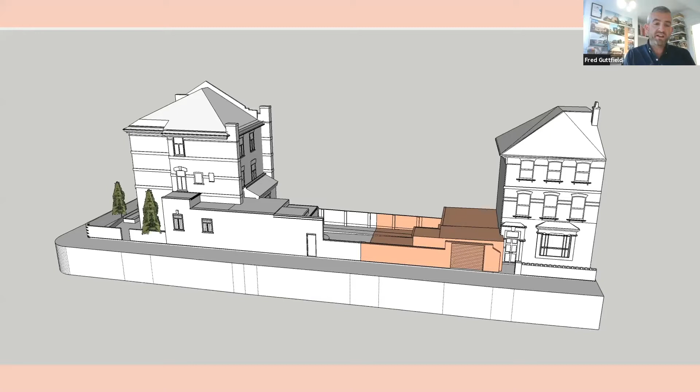So you have the frontage house on the main road, and then the side road which goes alongside the garden of the frontage house. The site in this case is the highlighted area. The frontage house is on the left, and the back garden is the site.

In this case, the site is very small. It's only 11 meters side to side and 8 meters back to front. The front elevation faces roughly southeast.

When we first visited the site and met our potential client Mary, we had to battle our way through lots of undergrowth to find the bottom of the garden. At that stage, there was a rundown workshop and garage structure.

At this meeting, Mary started to explain some of the very long and difficult history she had with the site.

She owned the frontage house on the left of this image. Originally her aim was to really sell the bottom of her garden with planning permission as a development. So back in 1999, she applied for a quite traditional new build house scheme on the site.

That was refused. She appealed, and the appeal was refused too. She left it a few years to see what happened, and started to notice more contemporary back garden schemes happening around Hackney, especially in conservation areas, and sensed there had been a change in attitude from the planners.

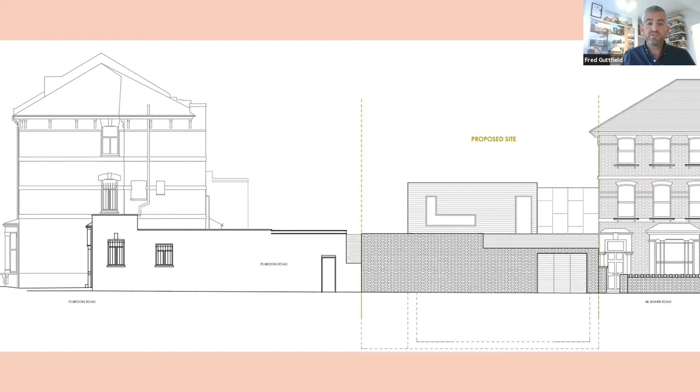So she thought about finding another firm of architects, not us, someone else, to develop new schemes for the site. A 2-story plus basement scheme was submitted, but unfortunately that was refused. Then they developed that scheme by taking a story off, so a 1-story plus basement scheme was submitted, and that was also refused.

So what year are we at now, Fred? How long into the process is this? I think we are probably, from memory, certainly post 2005. So between 2005 and 2010, that kind of era.

Understandably, she was losing faith at this point. But the interesting thing about Mary is she has training as a barrister, though she hasn't worked as one. In the end, she decided to take this scheme herself and write the grounds for appeal and appeal it.

She was quite lucky in that they were able to get a site visit with the guy from the appeals service, and eventually the appeal was successful. So she found herself finally with planning permission for a dwelling at the bottom of her garden, but there were several issues with the scheme that, after consideration, she felt would be problematic.

The main reservation was how the building looked from the street. There were problems with the internal layout, and also it had been such a long time since 1999 that her circumstances had changed, and she now wanted this house specifically for her and her husband to move into as a downsizing exercise.

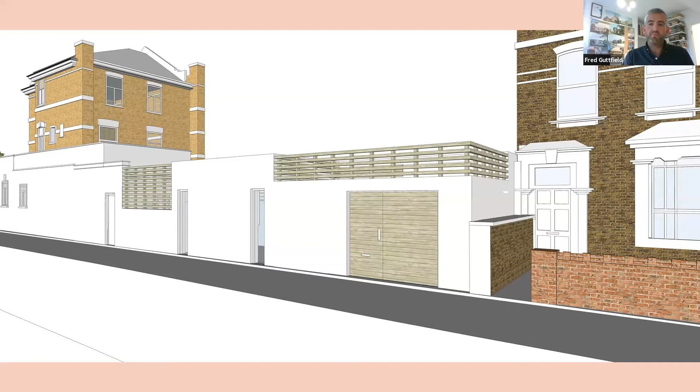We agreed with Mary that we would carry out a feasibility study, looking at the existing permission in detail, analysing the design, seeing what needed to be changed, what could be changed, and then putting in a pre-app with Hackney to get pre-application advice and find out their response. So we did that. We went through the design and identified some of the issues, the appearance from the outside, a slightly muddled front elevation, things like that.

We also identified some issues with the potential structural approach. Some of the ideas around budget that she'd been given were not really realistic. So we had quite a few issues that we needed to work with Mary to understand what was possible on this little site.

However, the main problem we had with this house was how it related to the street. We felt this house had been almost entirely hidden away behind a wall. It really only gathered light from above, from roof lights and light wells. And although that's great for preserving privacy, it also means you've got very little outlook, because obviously the rear elevation faces onto a garden, so there's no windows there. The side elevation faces onto her back garden, so no windows there either, and the other end is up against a building. So the front of this house is the only opportunity to have any form of outlook, apart from into a small internal courtyard. We really felt this wasn't the right approach, and it was quite disconnecting from the street. We really wanted to change that relationship.

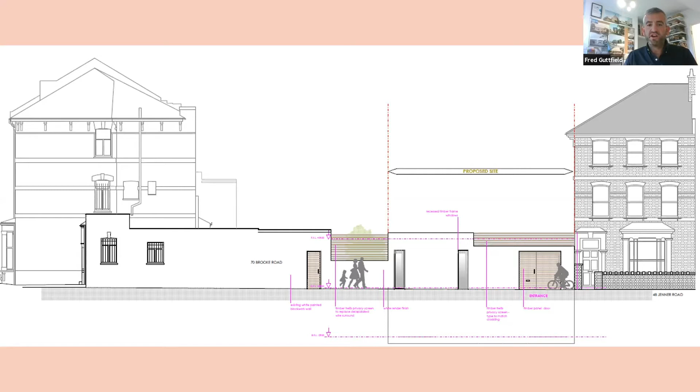Talking to Mary, she agreed, and I think it struck a note that that's what had felt strange about the design to her, that it was quite isolated. Were you surprised it got through planning on that basis, Fred?

I think that she was almost kind of punch drunk, I imagine. But talking to her, by that stage, I think she was just going with the flow and wasn't being too critical about the designs that were going in.

I think she's learned a huge amount through this process, trial and error really, in who she's been working with, but also how she's worked with them, being vocal about her opinions, and having someone she can have that relationship with. I think previously it was a 'here's the design' type conversation, whereas we like it to be different to that.

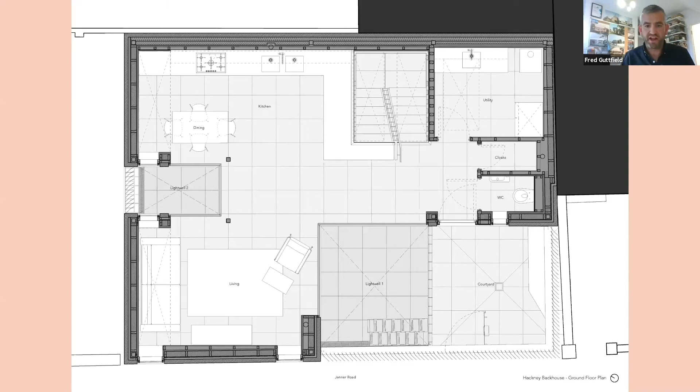There was a bit of a dialogue in that the house became part of the street and the street became part of the house. So skipping on - I'll take you through the whole thing - this is the design that we put forward for pre-application to Hackney. We'd addressed lots of the issues internally with the layout, structure, and talking to Mary about the budget, all that kind of stuff.

But the device to allow this relationship between the house and the street was a vertical screen, a screen of vertical louvers effectively, with the access gate and an area with more opening, etc.

So at this point, because of Mary, the history of the site, and Mary being quite nervous about going to Hackney, we were very selective about what we changed with the scheme. We didn't want to change anything unnecessarily. We really wanted to talk to Hackney only about things that needed to be changed. So it wasn't a wholesale redesign for redesign's sake. We had to be quite analytical about what we could keep and what we couldn't. Specifically, we kept the same volume, the same footprint, and didn't increase the height. Those were key constraints when redesigning the house.

So we put it in for pre-app. Luckily, the design officer was very supportive, thought it was a great improvement, and became quite a helpful advocate for the scheme throughout. So we were able to pretty quickly turn it into a planning application.

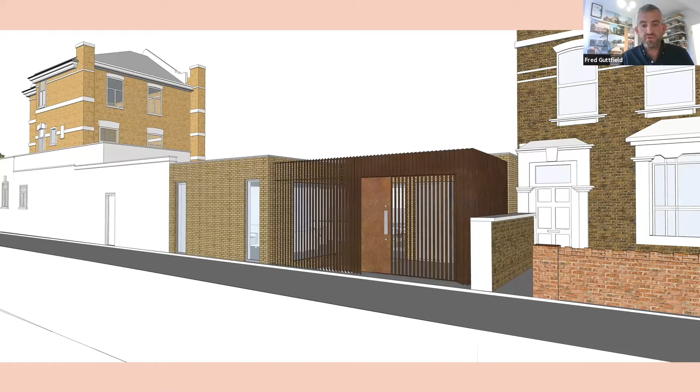Just while I've got you there, a good question's come from our audience. John Curran has asked, was there continuity with a single planning consultant? Indeed, was there a planning consultant? Did you work with someone?

No, we didn't. Generally on the schemes we work on, single house schemes, we're quite knowledgeable on planning. We don't often use planning consultants. We have a very friendly planning consultant who we kind of talk to, let's say, informally. In fact, we're doing his house now at the moment in the Cotswolds. But on something like this, I don't think you would always need a planning consultant for something like this, personally.

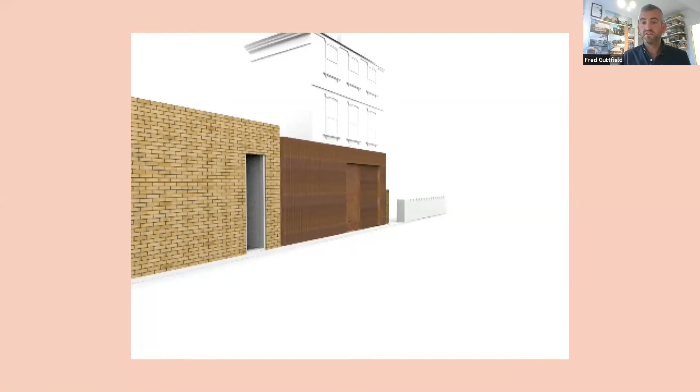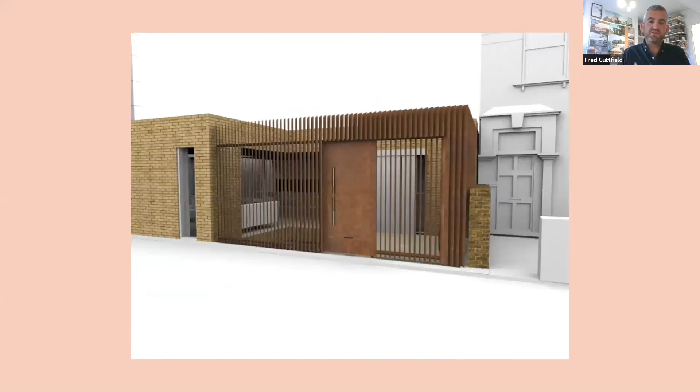So just a quick little movie. This is a model we produced and used during the design stage just to allow us to design this screen quite carefully, because obviously the spacing of the fins, this kind of privacy-openness relationship was quite important. The spacing of the fins, how deep they were, all those kinds of factors were very important in just getting that relationship right, because we wanted the house to be livable and to not feel like you were too open to the street.

I want to talk to you now in a little more detail about the process of constructing these louvered screens, mainly because, alongside all the other things - basement construction, the normal day-to-day stuff - this was a really fun process. For us as architects, it's really nice when we get an opportunity to get our hands dirty. We're detailed people, and we love getting into the one-to-one and physically helping to make something a reality.

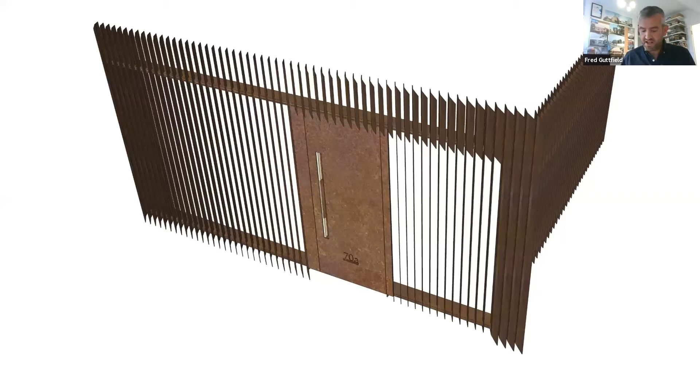The other thing is, because of the way this thing had been designed, it was a very precise structure. The structure had to be very light, so it was important that we couldn't have columns and posts and things ruining the appearance of it, because it was all about the visual and the view through. So it therefore had the potential to be extremely expensive, this structure.

Especially if we'd basically taken the planning level drawings, maybe added a bit of detail, but essentially handed them over to a fabricator and asked them to take full responsibility for everything. Quite often now architects are happy to just hand stuff over and let a fabricator take responsibility for the detailing, the drawings, and also the delivery and installation. We didn't want to do that because we thought it would add exponentially to the cost, and also we quite enjoy this kind of thing.

So we worked hand in hand with a fabricator, and exploring something in 3D like this in quite a precise way allowed us to bypass a lot of the additional work that they would have had to do.

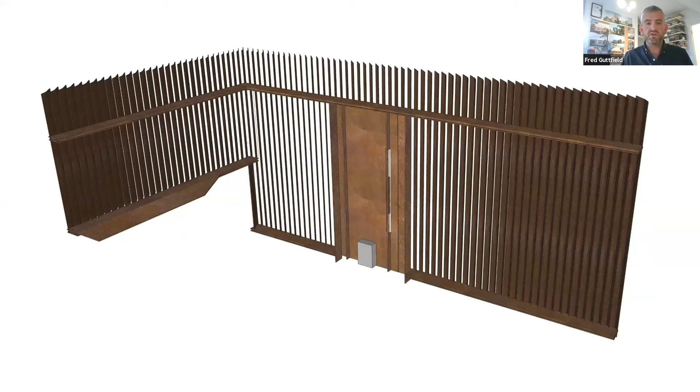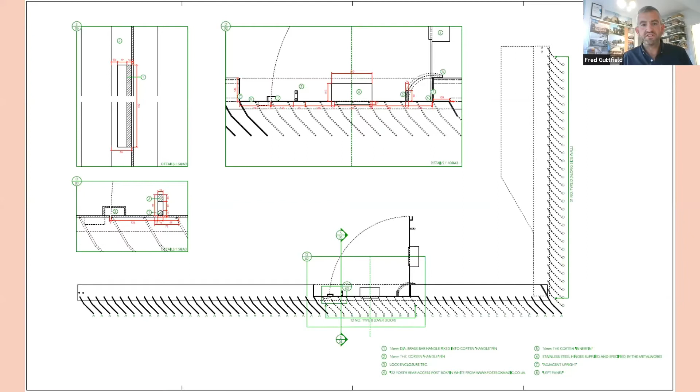I'm not going to labour the point on these drawings, but we were able to identify each piece of this component independently, draw it independently, and number them all. We could get into the detail of the letterbox, the handle, the numbering. There's a cycle store there. Each piece was numbered, ready for fabrication.

We were able to produce these cut drawings, which are a digital file that could be sent straight to the manufacturer's laser cutter to cut out the bits of metal that would all then slot together. We designed it like a Meccano set so that it could all be lifted into place fairly simply on site.

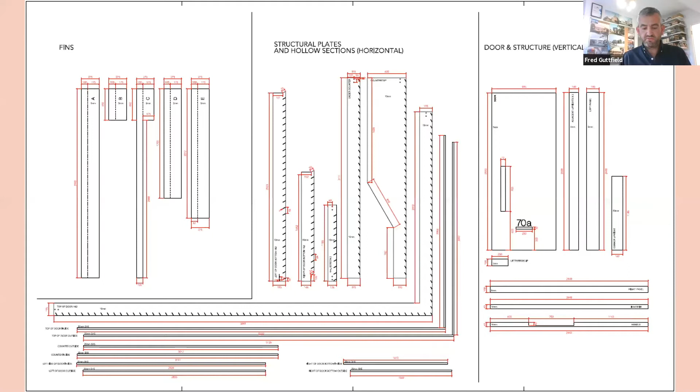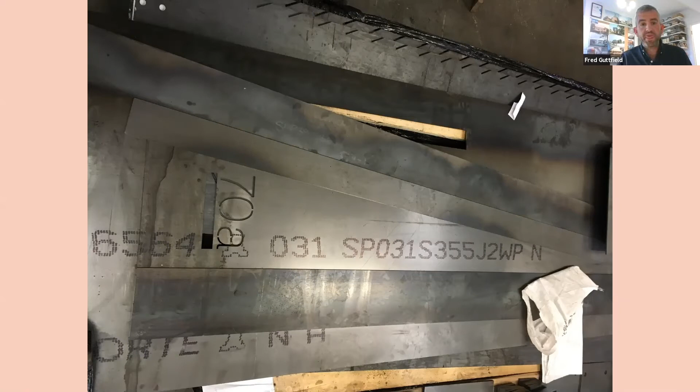That's at the point at which we then sent these files across, and this is the outcome. They collect their kit of parts. You can see all the slots there ready to receive the louvers at the right angle, all that kind of thing. It's quite fun as an architect being able to do this kind of thing, because you can really get into the detail, and you can draw and it become a reality.

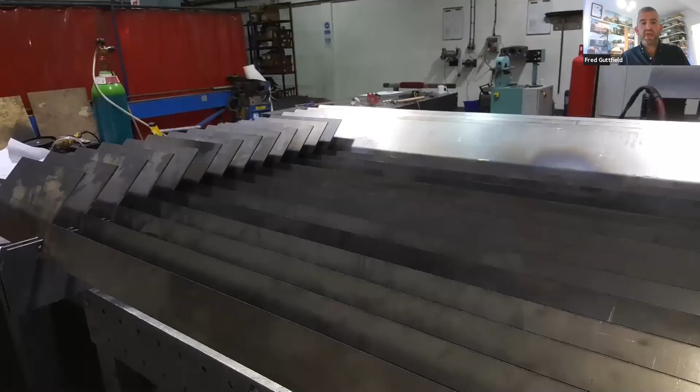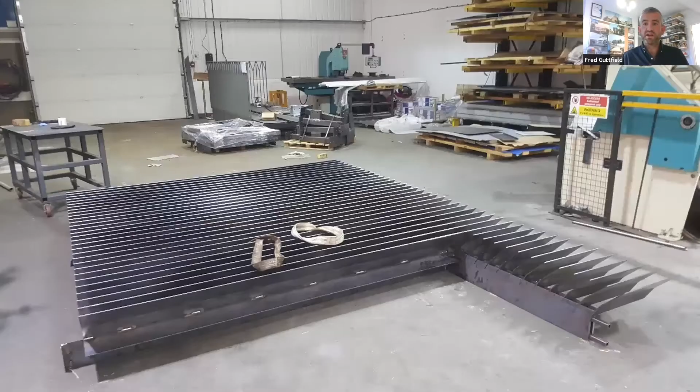It also gives you the advantage as the fabricator to weld and assemble under workshop conditions and know that everything's absolutely bang on perfect. So this is one of the pieces ready to go onto the back of the lorry. And on the right hand side, you can see the concealed pin joints that we developed to allow the pieces to slot together, but only if they were craned in the right order.

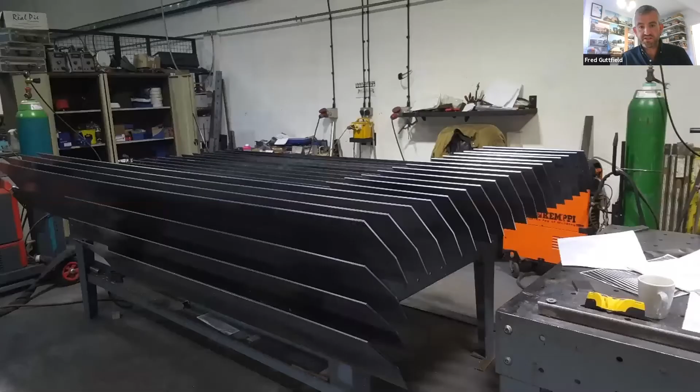Another of the pieces ready to go. This is the corner piece. You'll see that later. The detail here of the fins.

We introduced a kink into the fins, not only to stiffen them up, but also it creates quite a nice visual effect as you walk past. It gives you a kind of twisting. Although they're not moving, they appear to as you walk past, and that's just from the little kink. We discovered that from playing around with the 3D model.

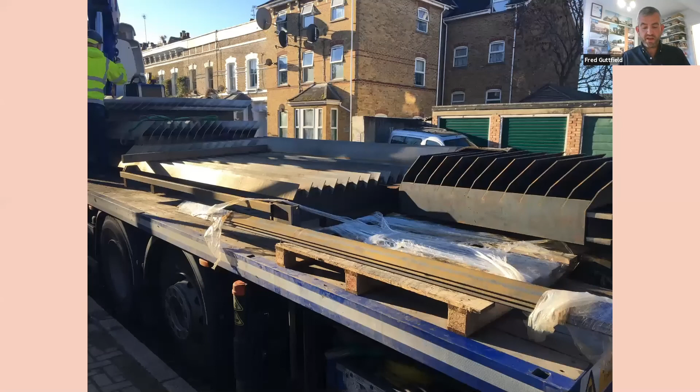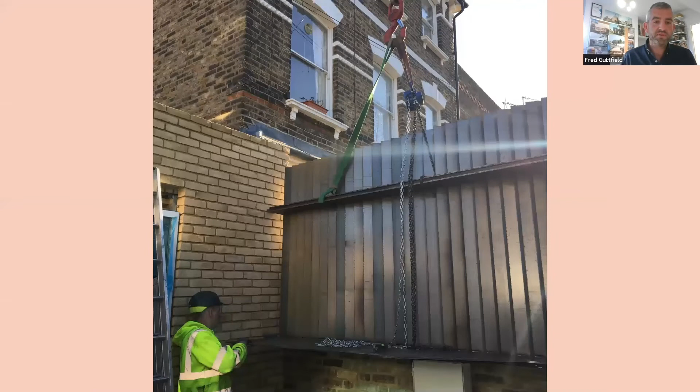So here it all is loaded up, ready to go on the back of the lorry. Then the crane on the back of the lorry is used to crane it into position. Here's the first piece of the puzzle going in. We've got some concealed steelwork coming from behind the brickwork there, which slots into the piece and allows it to be fixed on.

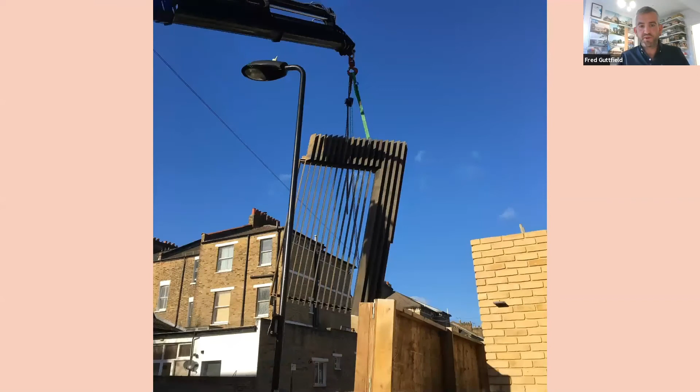I'm just going to rattle through these pieces being craned into position. This one on the corner went in quite nicely. A bit of brute force was needed. And then finally, at the end of a long day, this is the final piece going in.

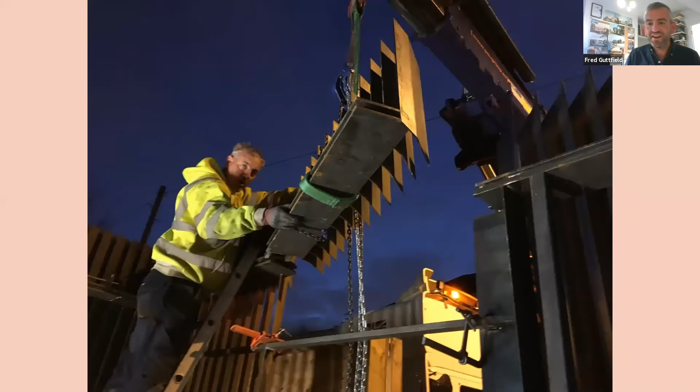So I want to talk a little bit about why we've used Corten as the finish, as a material for this. It wasn't a preconceived idea that we wanted to do something out of Corten, but we needed this thing to be constructed from steel because of what it was doing structurally.

We knew it would be craned into position, and possibly crowbarred as well, so we knew it was going to get bashed around. Therefore, it couldn't have a pre-finish. It had to be something that was finished on site.

Then you're into spray painting or whatever on site, and at that point Corten really comes into its own because it's a self-sealing, basically oxidization process. So you can just leave it to weather naturally. It takes roughly 6 months to come to a quite nice color, and then it continues on for a bit longer.

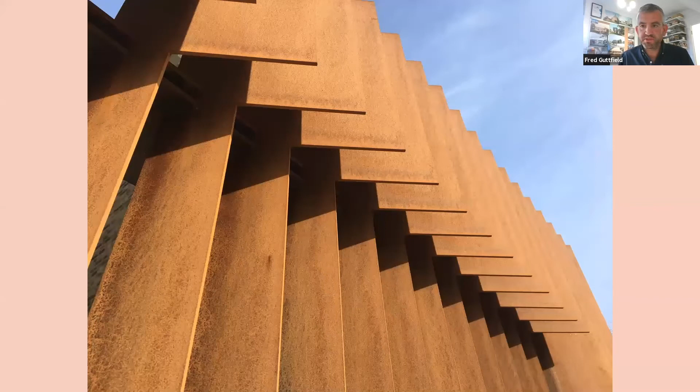So a few gratuitous shots of the patina. You can see the really nice surface finish you get.

I think these two, this and the next image, really show quite nicely the effect of this privacy screen in terms of the privacy inside the house and the relationship with the street. Here it is — from most angles, you don't get any view through at all. But then there's a very particular angle where you can get that view in.

I think what's interesting is as a pedestrian, you can walk past and you can look in. You can stop and stare in if you want to, but crucially, the spacing of the louvers meant that as a car or a bike went past, you just can't see in. The louvers are just too close together, and you just can't make out the image behind.

Fred, did Mary take much convincing, both with the materials and the way in which the relationship was with the street? Yeah, so the 3D model was crucial, really, to be able to show Mary — you can see the figures in the background here — where would be visible, where you'd be visible from, and that was done in conjunction with the planning and layout of the house, and we got it to a point where we thought it was about right. There's all little moves, like even introducing the kink into the fin, had quite a significant impact on the view through.

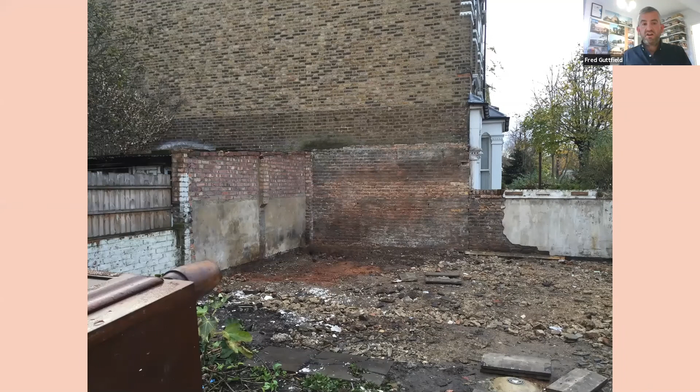So this is the site without the old garage and workshop on. You've got to first visualize the space you've got, and then imagine digging a great big hole there, and effectively everything around just wants to fall in. At the back of that photo, that's the neighbouring houses. Obviously we're going to be digging below their foundations, so that whole wall's going to want to collapse. So the first thing you have to do is underpin their wall, which means digging out and creating a concrete foundation for their wall.

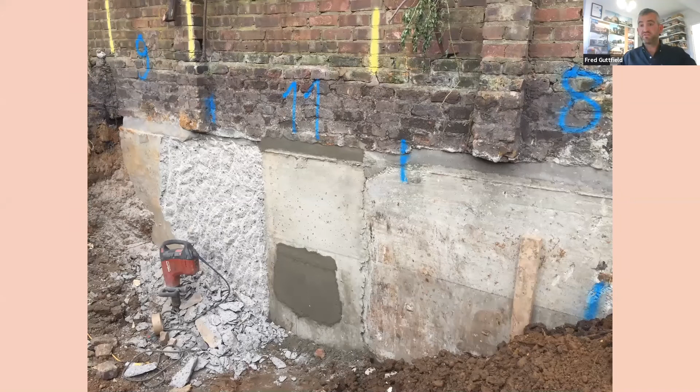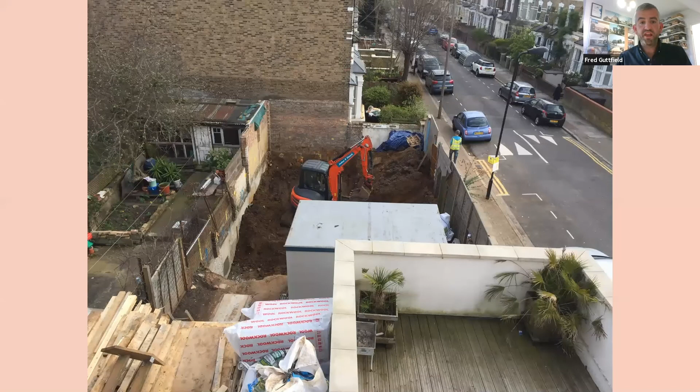You then can start digging away, removing the spoil. Even another thing to think about, some of you might be considering a basement under an existing house. This is a relatively difficult site, but so much easier than basements we've done under existing houses. So think about the practicalities of machinery, digs, getting rid of spoil, all that kind of thing.

So you can see what a tight site this was, and the fact that on this site we were building right up to the boundary on all four sides. So we didn't have any space to play with in terms of site setup - everything had to keep being moved around the site as we dug and removed material. Let me just flick through.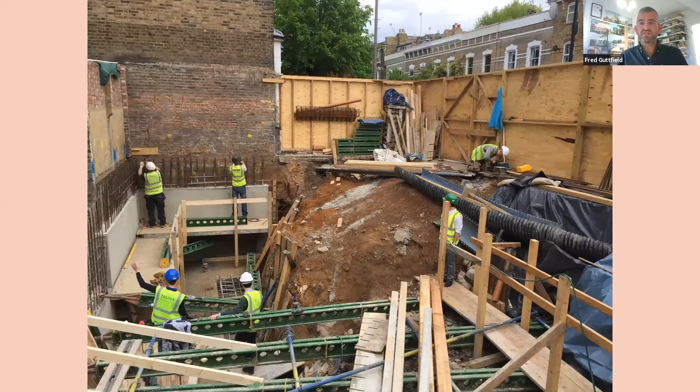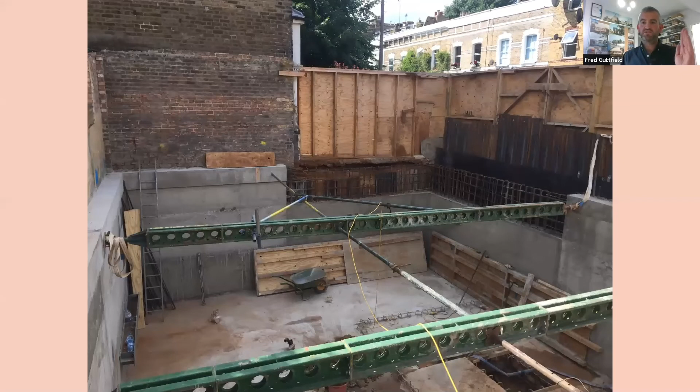Then you start to create this concrete box, and the concrete is being pushed by earth all the time, so you've got to continually prop this concrete to stop it, to allow it to cure and become strong. It's a tricky process, and I think a lot of people don't appreciate the work that's involved in this, and the poor contractors down in the dirt doing this day in, day out.

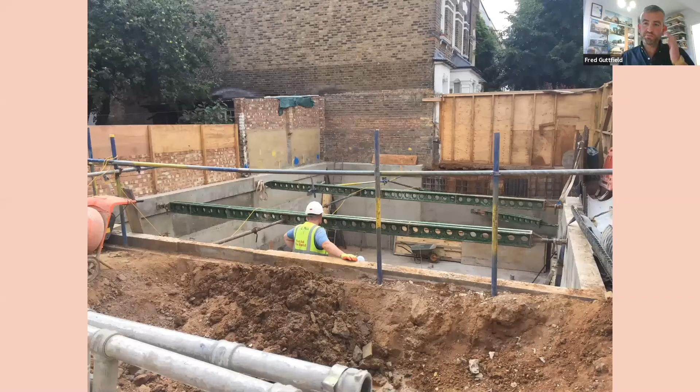How long did that process take? Well, so that's the thing - we spent a year building this house, and I think 7.5, maybe 8 months of that was the groundworks. Wow. So the groundworks are incredibly slow, and it takes time and it's expensive.

So you form a concrete box, and then you can start to see some of the outlines here of the light wells starting to appear. Once you've got the concrete box, you have to line it, waterproof it, because you've got water hitting that concrete from the outside. That all needs to go somewhere, and needs to be pumped away.

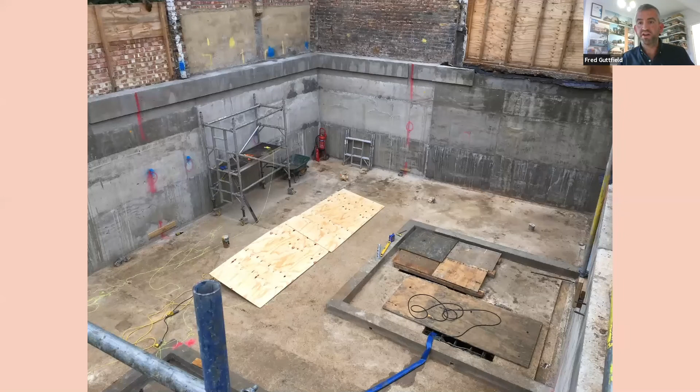You're most likely going to be below the level of the sewers as well down there. So if you've got bathrooms or utilities down there, the wastewater from those appliances and loos needs to be pumped back up as well. It's an expensive way of working. And since we've started doing projects outside of London, you don't really find that the land prices really support or justify this kind of work.

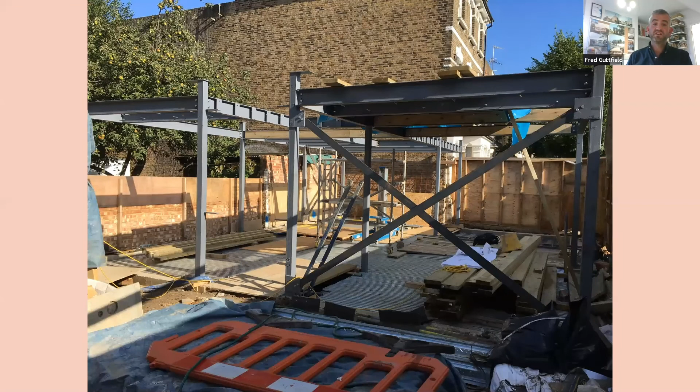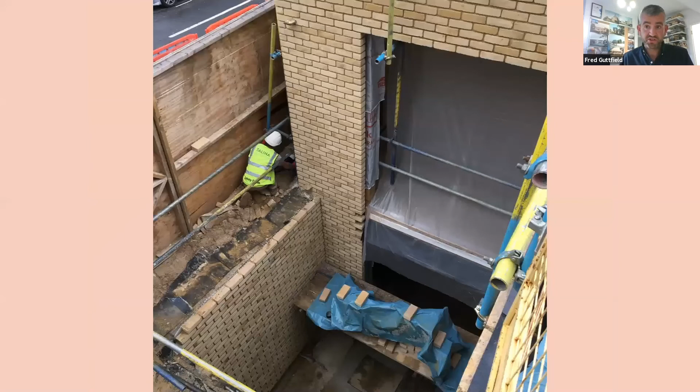So then once you've got the concrete box, you're basically into more normal construction. On this, we did a very lightweight steel frame, and then infilled it with timber, and then the brickwork is non-structural - it's just a skin on the outside. Then the flat roof goes on before the sedum, and that's where I'm going to leave it.

Beautiful. Fantastic. Thank you, Fred. That's all right. That's brilliant.

Just while Dean is having a look at some questions from the floor, I'd like to ask you one myself, Fred. In your practice, you've got a reputation for working with difficult and challenging sites, such as Mary's site here. What is your approach when you get started on a really challenging site? What's your thinking?

So our approach to all projects is to go in with a completely blank mind. It's to effectively, you know, not start designing for as long as possible. I find if you go with a preconceived idea of a design before you really understand the site or the client, that's not likely to be the best or most efficient solution. If you try to impose an idea on a site, that's going to be an expensive way to go. So we really hold off. We won't do sketches for the first meeting or anything like that. That's really not how we work at all.